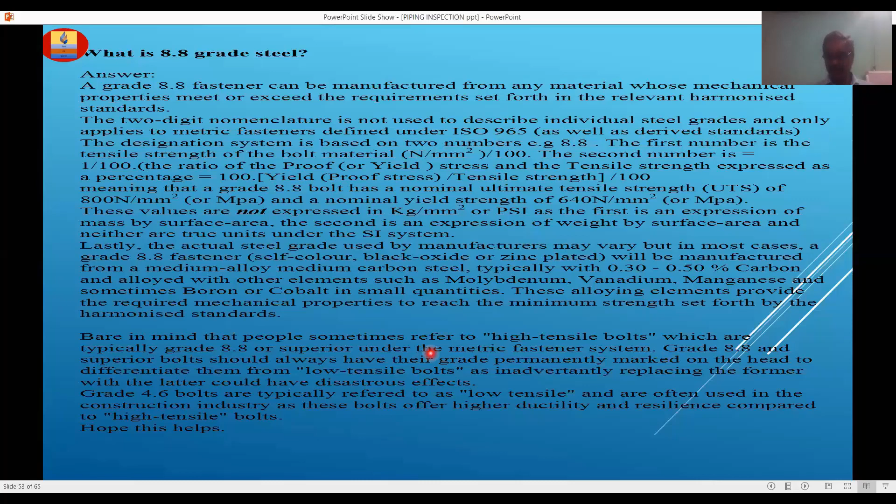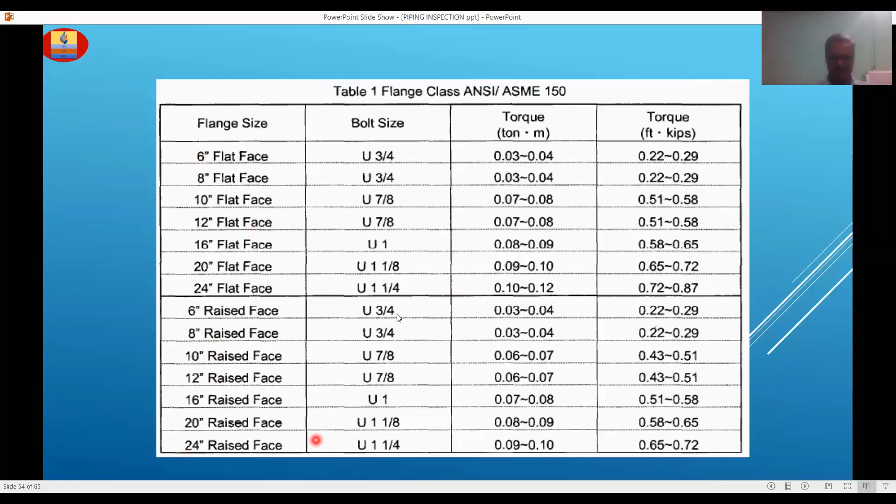Okay, table 1: flanges, flange size, bolt size, torque in ton meters, foot pounds, KIPS, torque. Okay, 6 inches, 8 inches, different sizes are there. 6 to 24 inches. 300 class, again 600 class.

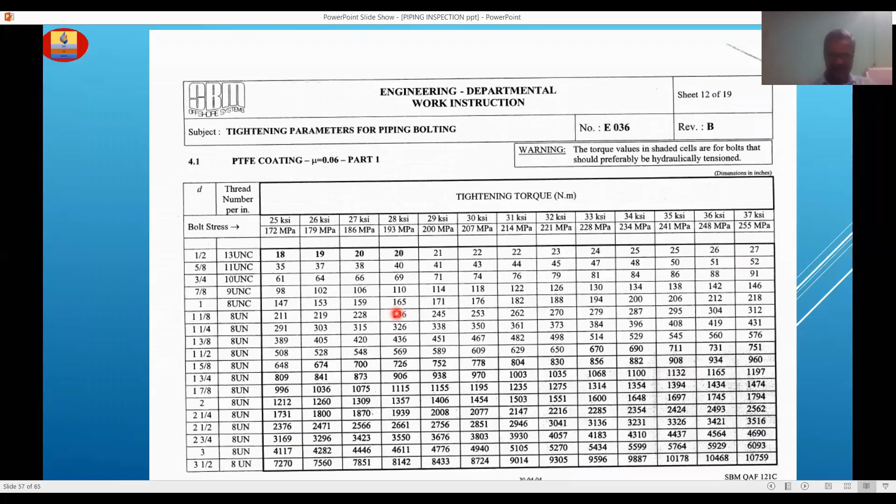Fireproofing. Reference documents: owner's procedure, specification, ITPs. Check the structure is released for fireproofing. Check the surface profile is clean and free from scales and foreign material. Check DFT of the primer paint if applied. Check clearance between steel surface and wire mesh.

Verify concrete cube test report, compression strength of concrete cubes. Confirm the cable tray entry, if any, is protected. Ensure good workmanship. Confirm the application of mastic paint against the ingress of water inside the structure. Ensure the required fireproofing thickness is achieved. Check flow rate with marsh cone as recommended in procedure, hardness.

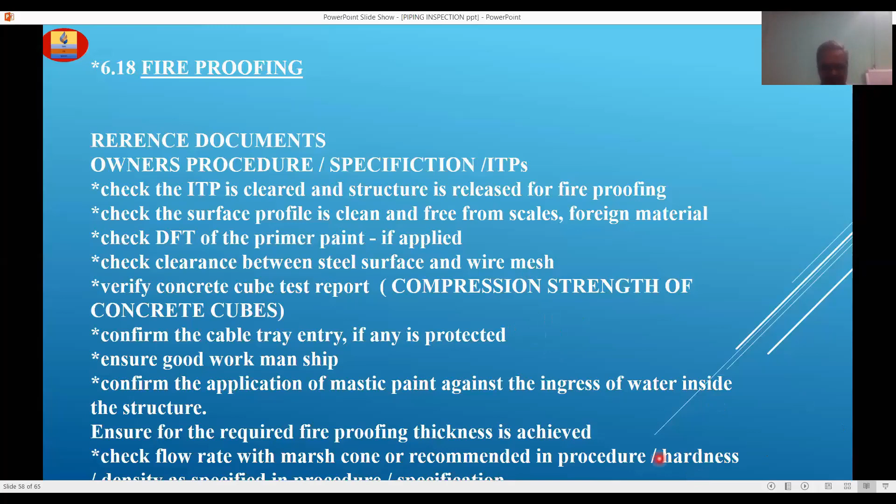Test positions of pipe and plate. Butt weld preparation as per Section 8, B16.25. Weld PQR Section 9. DIN 8561, 8560. Cladding DIN 8585. Test positions pipe, Section 9, QW 461.4: 1G, 2G, 5G, 6G, 6GR. Structural groove welds QW 461.3: 1G, 2G, 3G, 4G. Fillet welds QW 461.4.

1F, 2F, 3F, 4F. Fillet welds pipe and plate QW 461.5: 1F, 2F, pipe plus plate rotate, 4F overhead. P number as per QW 422. F number as per QW 432. Grouping weld electrodes for qualification. Welder qualification related, refer Section 9 WPS sample format.

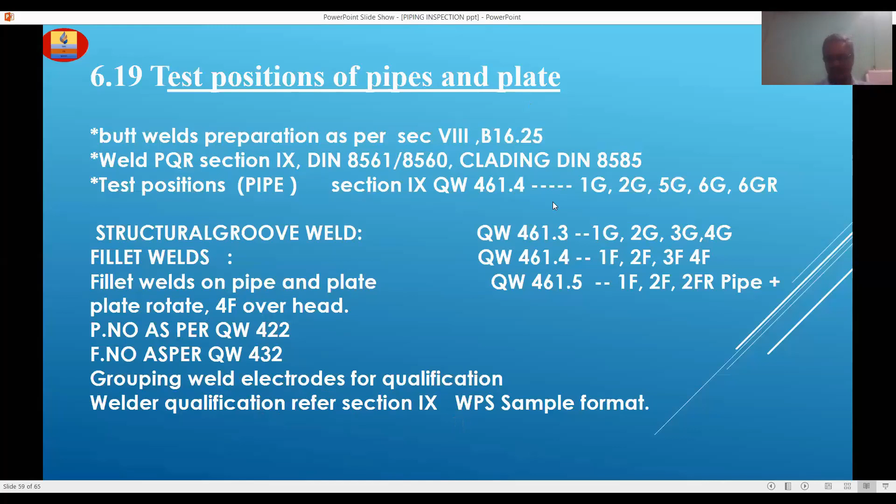We have to follow only the WPS. Okay. And whatever tests they require, they will specify in that. Just I am giving this 6.19 for information purpose. Go through this. You can see this is the last chapter in this video. Only just I am giving information.

Reference codes and standards: ASME, ANSI, BPV. Section 1, power boilers. Section 2, part A, ferrous materials. Section 2, part B, non-ferrous materials. Section 2, part C, welding electrodes and filler materials. Section 2, part D, properties. Section 3, subsection NCA, general requirements for division 1 and division 2.

Division 1, subsection NB, class 1 components. Subsection NC, class 2 components. Subsection ND, class 3 components. Subsection NF, component supports. Subsection NG, core support structures. Division 2, code for concrete reactor vessels and containments. Section 4, heating boilers. Section 5, non-destructive examination. Section 6, recommended rules for care and operation of heating boilers. Section 7, recommended guidelines for the care of power boilers.

Section 8, pressure vessels, division 1 and division 2, alternative rules. Section 9, welding and brazing qualifications. Section 10, fiber reinforced plastic pressure vessels. Section 11, rules for in-service inspection of nuclear power plant components. B31.3, in-plant process piping. B31.4, liquid transportation lines. B31.8, gas transmission lines. B31.1, power plant piping.

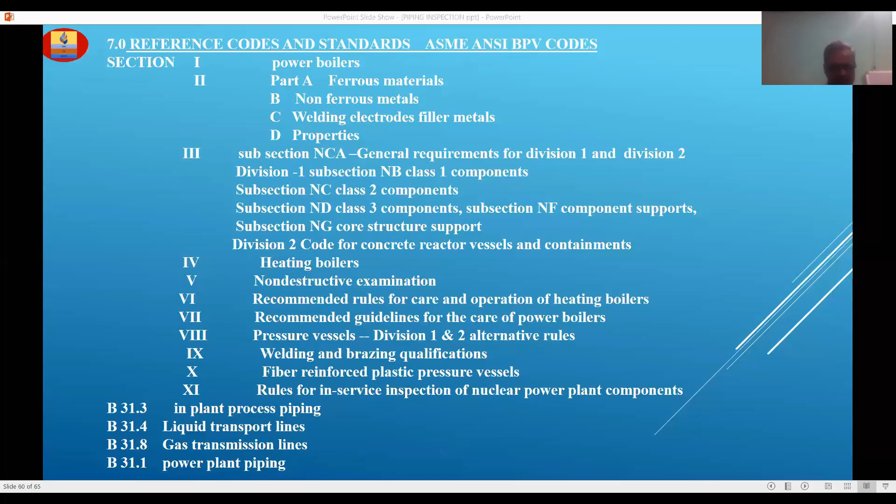American Welding Society, A3.0, welding terms and definitions. A5.1, covered carbon steel arc welding electrodes. A5.2, iron and steel oxy-fuel gas welding rods. A5.5, low alloy steel covered arc welding electrodes. A5.17, carbon steel electrodes and fluxes for submerged arc welding. A5.18, CS filler metals for gas shielded arc welding.

A5.20, CS electrodes for flux cored arc welding. A5.28, LA steel filler metals for gas shielded arc welding. A5.29, LA steel electrodes for flux cored arc welding. NACE RP0472-95, methods to prevent in-service cracking of CS weldments in corrosive petroleum refineries. API code for valves.

API 661, air-cooled exchangers. API 650, welded steel tanks for oil storage. API 620, large welded low-pressure storage tanks. API 653, tank inspection, repair, alteration and reconstruction. API 1104, standard for welding pipelines and related facilities. API 682, rotary and centrifugal pumps, shaft sealing systems. API RP, recommended practice.

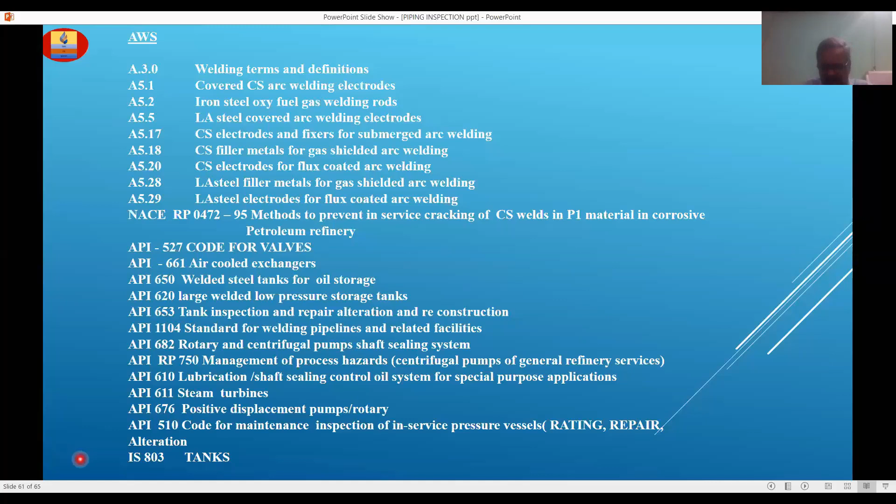American Petroleum Institute recommended practice 750, management of process hazards; centrifugal pumps for general refinery services. API 610, lubrication, shaft sealing and control oil systems for special purpose applications. API 611, steam turbines. 676, positive displacement pumps, rotary. API 510, code for maintenance inspection of in-service pressure vessels, rating, repair, alteration. IS 803, tanks.

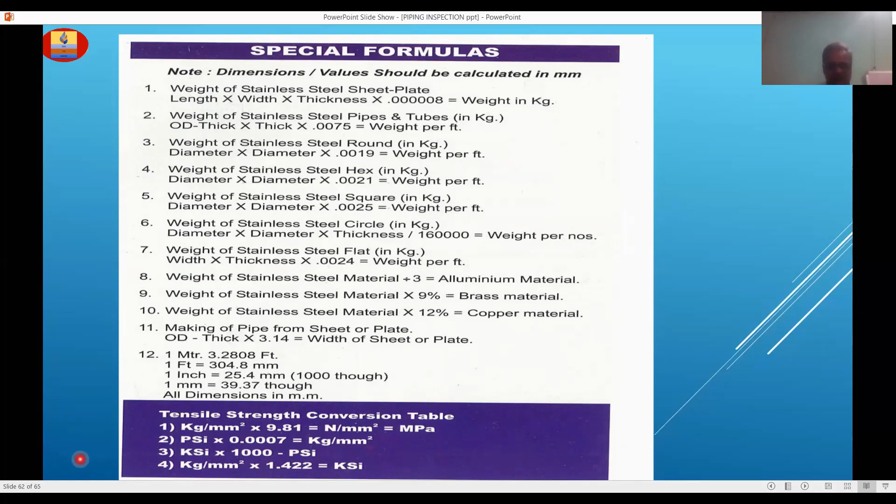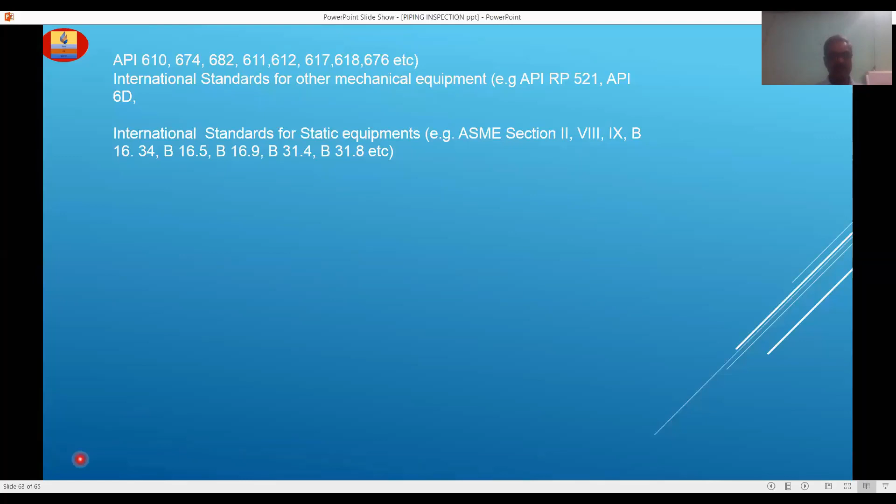As I told you, if I talk about all these things, it will take a lot of time, and the information I am giving you here is to go into the specific standard or code, refer it and note down the valid points. Okay, just for information I am giving here.

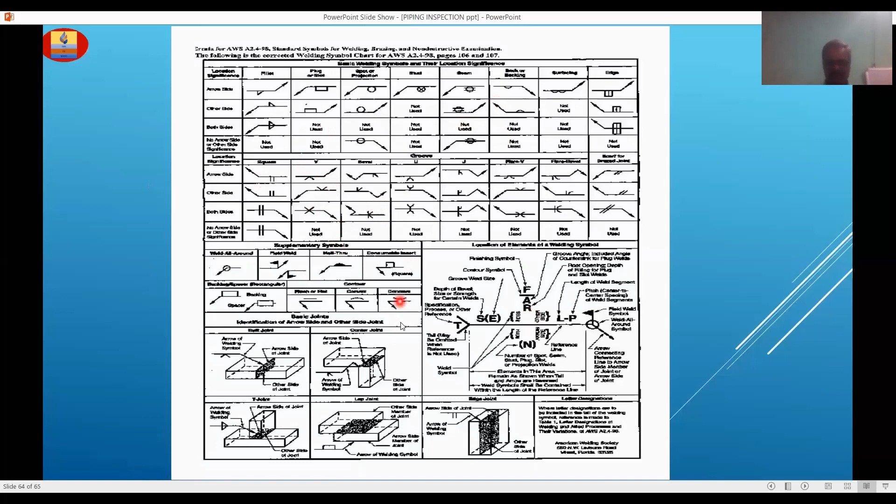Take a printout and try to maintain a small handbook and write down types of welds, arrow mark welding, type of welding, different things are here. You can understand. Okay, as an engineer, I don't think it is required to explain.